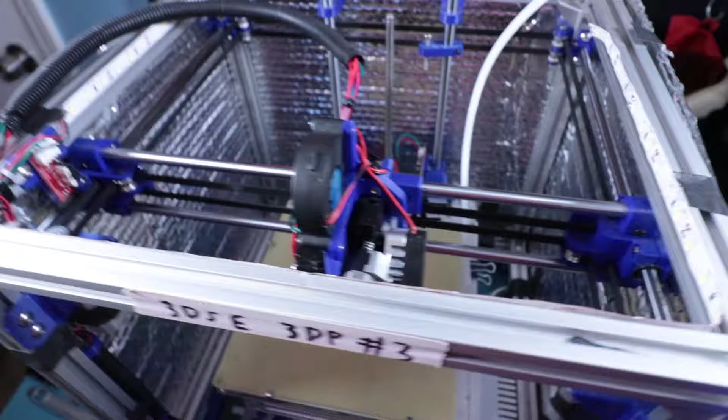This is your host Michael, and today I'm going to show you all how to make a custom little circuit board, specifically a breakout style board where you have multiple connectors going into or just feeding in other connectors so you can quick disconnect things.

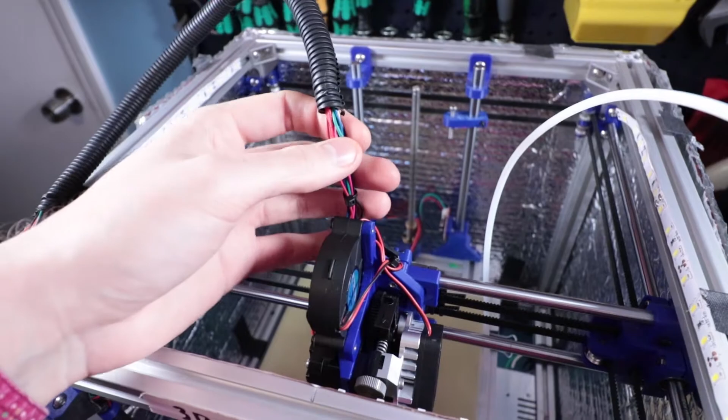Now the main reason I'm doing this is because with this particular wiring loom here, if I need to replace any parts, it's a big pain to replace any wiring or replace a particular unit, because I usually have to do these weird connections and have them zip tied so they don't come apart. And I've had issues with splices and wiring. In a particular example, the two fans for the hot end here, the positive lead for these are spliced in through this little connector here. I tried soldering it, but the solder link has failed.

So essentially what I need to do is basically make a breakout board between this part of the wiring harness and the various connections like the fans, the thermistor, and the end stop around the back here. Just in case I need to replace any of those or service them, I can just disconnect them from the breakout board and then reconnect them.

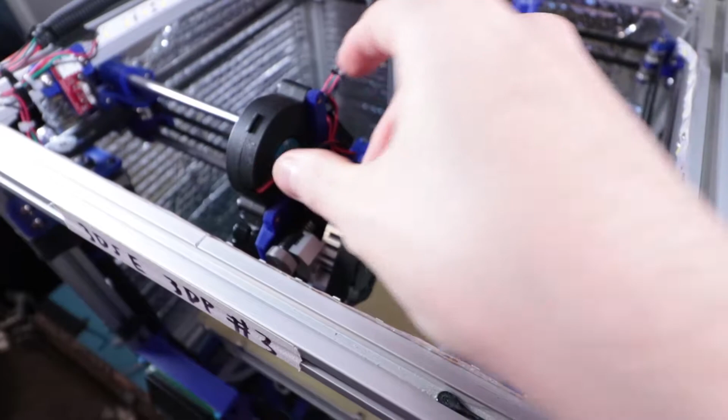Now the position for the circuit board, I think the most optimal place would be right here behind this fan. I have a little bit of an alcove for connections and pins and whatnot. It's just the best place, the most real estate, without taking up any real additional space or causing any issues with it colliding with any other moving parts. So it's pretty well protected.

The only thing I do have to account for is I occasionally have to pull this back to pull out filament and run new filament in. So I do need to make sure that the connectors aren't really interfering with my fingers when I do this here, as well as this tube. So there is a little bit of clearancing I have to take into account, and there's also the spinning gear wheel for this extruder.

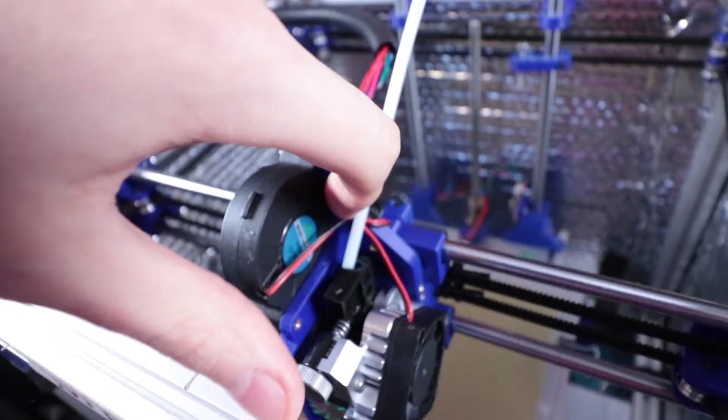What I'm going to do is I'm probably going to eventually reprint this bracket to where it has two additional holes to mount the circuit board, but for now when I do install the circuit board, I'm just going to drill a couple holes and do these little solder nut insert type things.

Now before I go ahead and start designing this circuit board, I need to figure out what components I'm going to be using, mainly because I need to figure out the package size of each individual component and how they're going to lay out on the board. So that's one of the first things you'll want to figure out, your bill of materials essentially for the components you want to solder on here.

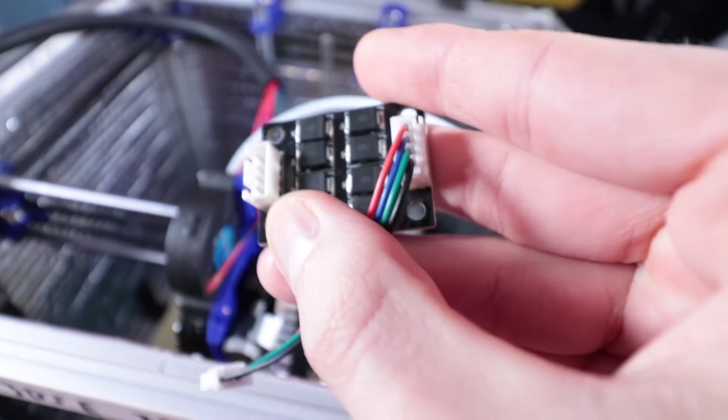Now there are a couple methods of attaching components to a circuit board. For instance, on this particular circuit board with these diodes, you see that they are SMT or SMD, so they are mounted directly using a solder paste. And then there's also through hole like these connectors here, which have little pins that you usually have to manually solder onto a board for low production runs. You can't just place them on the board with solder paste like these guys, which I actually do have a toaster oven slash PCB oven for that I made myself. It's a little bit more involved in the process, and obviously I don't have the parts here.

Since this is just going to be a simple breakout board, all I'm going to be doing is having connectors like these little female type JST XH connectors, as well as a couple of DuPont style connectors. So I've got a couple of 2-pin and 3-pin style JST connectors. I don't have the female ones with me right now. They're somewhere up in my attic. I have to fish them out for when I get these boards ready to rock.

These are the type of connectors that will attach the end stop as well as the thermistor to my breakout board. And then the rest of the connections will be handled by these DuPont right angle connectors.

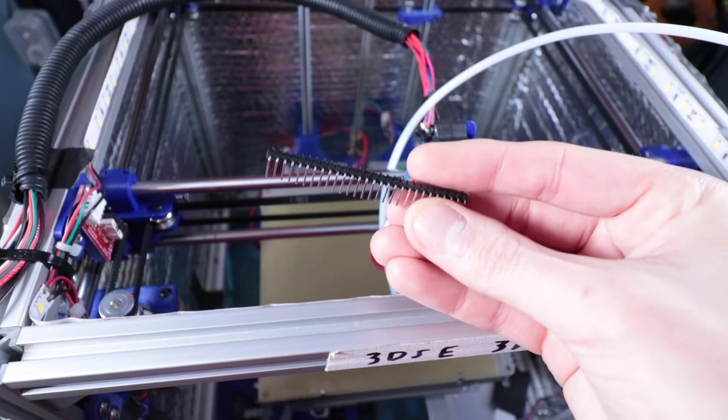So I'm going to use those two types of connectors, and that'll be the basis for it. I'm not going to do any filter caps or anything fancy like that, or any LEDs. Just going to keep it simple and make a simple breakout board. So let's go ahead and cut on over to Fusion 360. I'm going to show you the end product, and then we'll get into it.

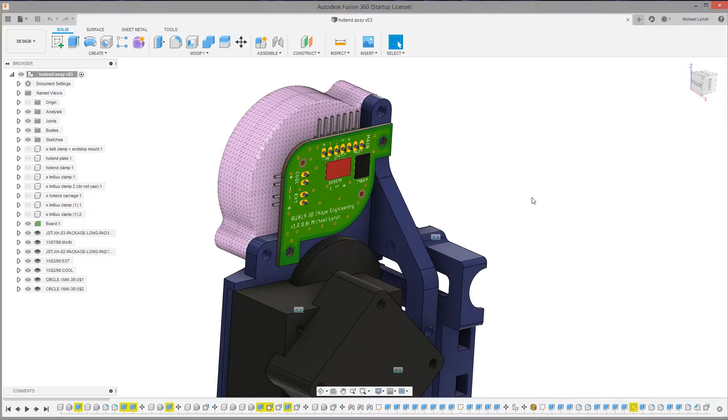All right, so we are in Fusion 360 now, and this is the hot end design file right here. And this is the circuit board that I made a couple days ago. I started out with Fusion 360, and then I went into Autodesk Eagle and made the circuit board design with the wiring and everything else. So what we have here is a main connector header, which is just 7 pins, and then we have an end stop connector.

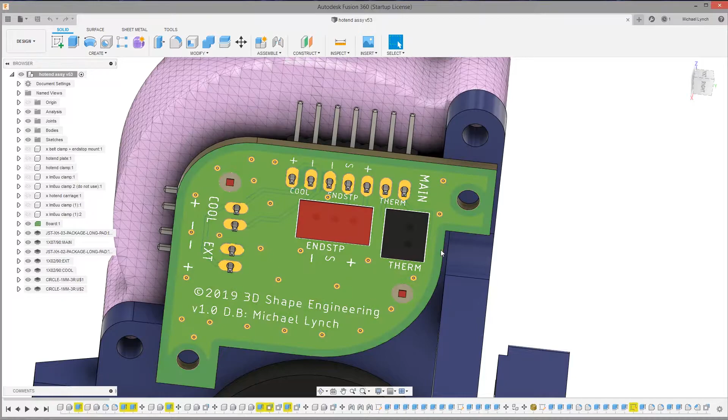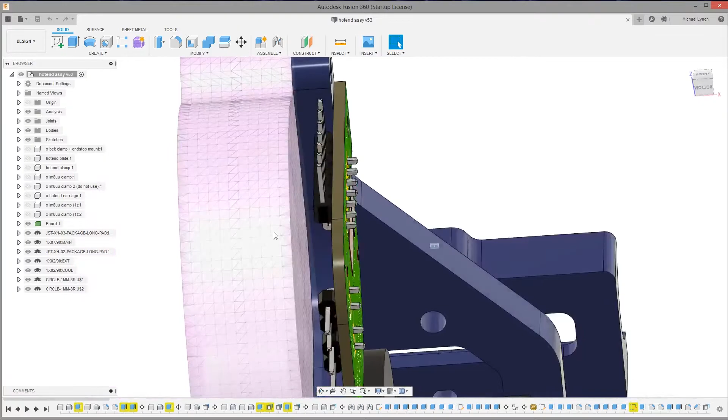Now that is of course that JST XH connector. I'll put it up on the screen. They don't really represent properly in the 3D view here. And then the thermistor, which is another one, which is a 2-pin. The end stop is a 3-pin. And then we have two angled connectors for the cooling and the extruder fans. As you can see, these angled headers are at the back of the board, so they're nice and tucked away and hidden. They're not really in the way of this mechanical bit here where I feed in the filament.

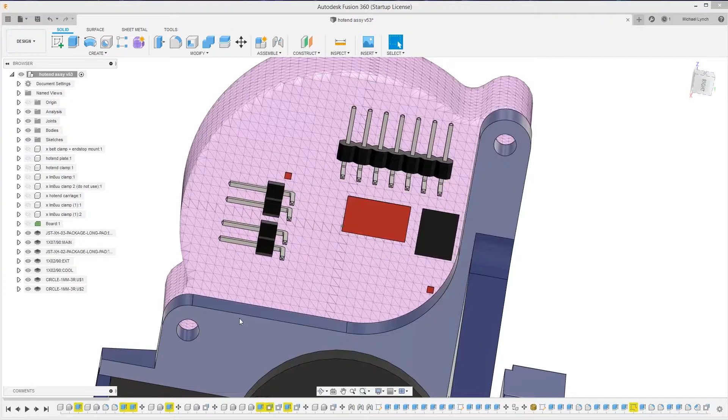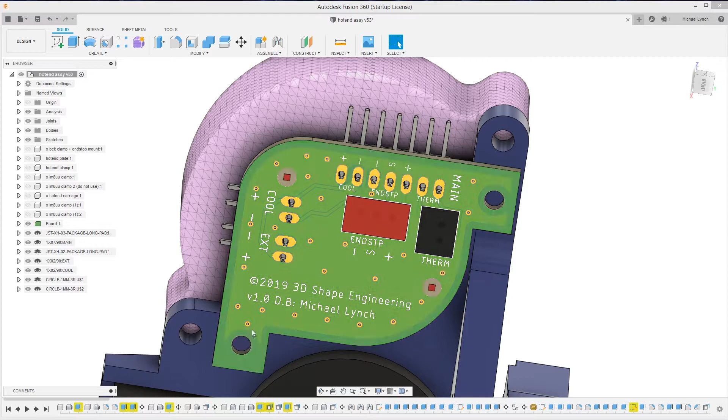So of course there's a lot of unused board space, but the reason I wanted to have the board's contour down here is quite simply because I wanted the board to make contact with this edge, so if you unplug or plug anything in, these two tabs on the side as well as the bottom aren't going to be the only points holding that load, in case it gets sheared off or what have you. So this is where these screw mounts will go. They're just little tabs that I left out.

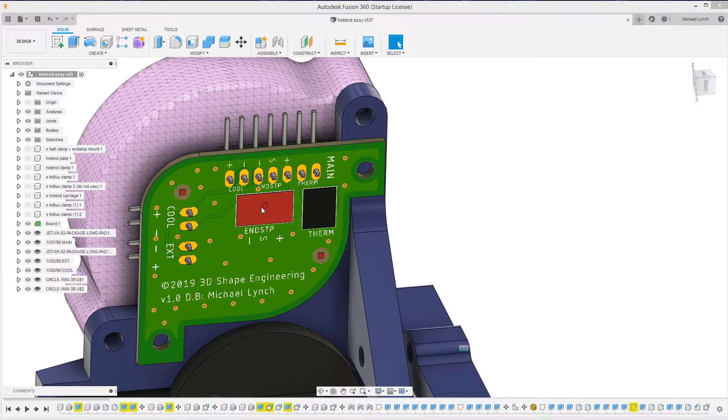Like I said, a pretty simple design, nothing too complicated here, very few traces, a lot of it's just direct stuff. And there are a few split traces. For instance, there is a shared contact for the extruder fan. The ground shares the same ground with the end stop, and its positive shares the same contact as the cooling fan. And the cooling fan, of course, has its own negative because that's controlled by PWM by the printer board itself. So that just snakes over to the contact points here. So it's 7 in, and then 9 out. So just a pretty simple design here.

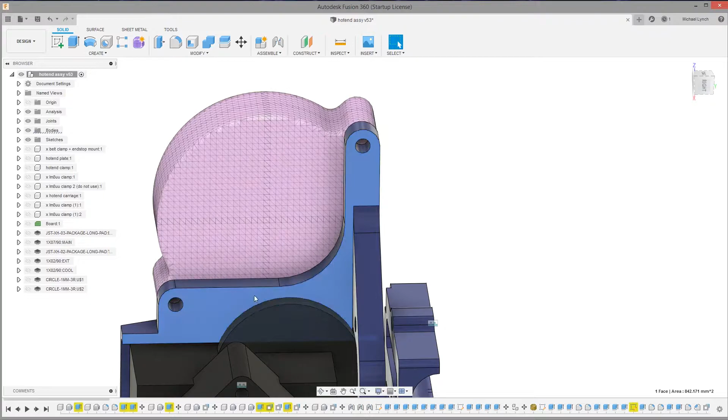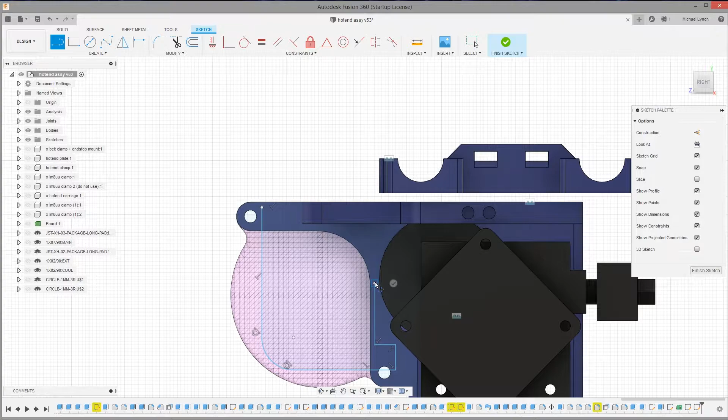So the first thing I want to do to get this design is make that guy invisible here. So I'm going to go ahead and create my sketch. We have our side profile here. Now I'm going to click on the face that I want to base the sketch off of, which is this guy right here, and then create a sketch on that face. I'm going to start with a basic line shape. Just going to have a little curved edge right here, 90 degree. And then we'll fix up the dimensions in a bit. Zoom in a bit, there we go. So I'm just banging out a quick design. Okay, so we have our basic shape.

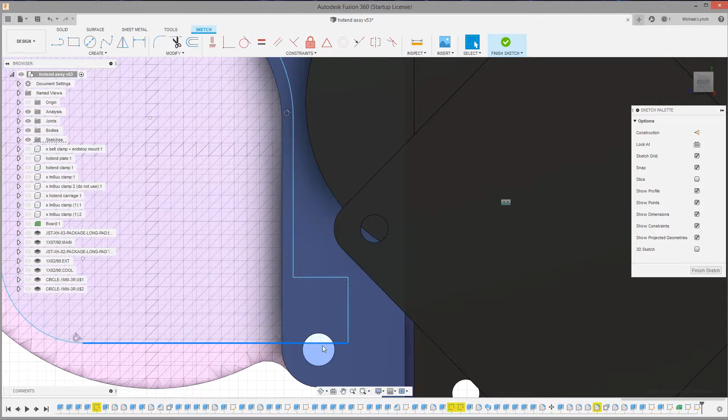So essentially we want to constrain it so it won't interfere with any other parts in the model. For instance, I have this conflict right here, where a screw thread may be poking out the other side. I definitely want to separate that a bit. I believe I had a good separation distance of about, oh no, it was 4. Okay, so I had 4, and these tabs right here are going to be about 8 millimeter.

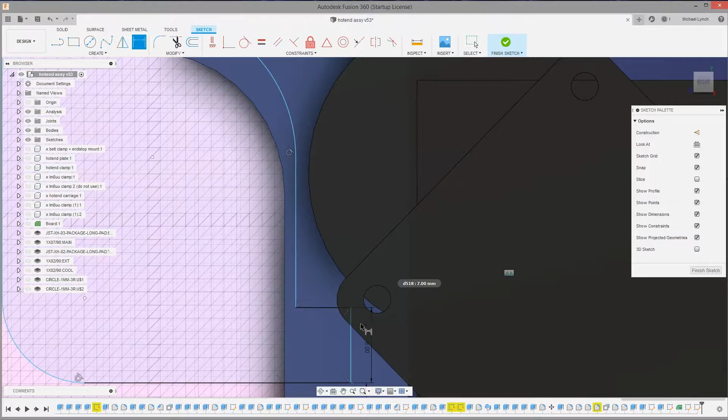Now it may look like it's conflicting with this heatsink here, which is what this part is, but it is not. The only thing I need to watch out for is this wheel, and of course try to keep any components away from this general area here. So just going to do the same with the other side, make it 8, and then a good 4 from that. Actually, I think that'll be the minimum measurement for that.

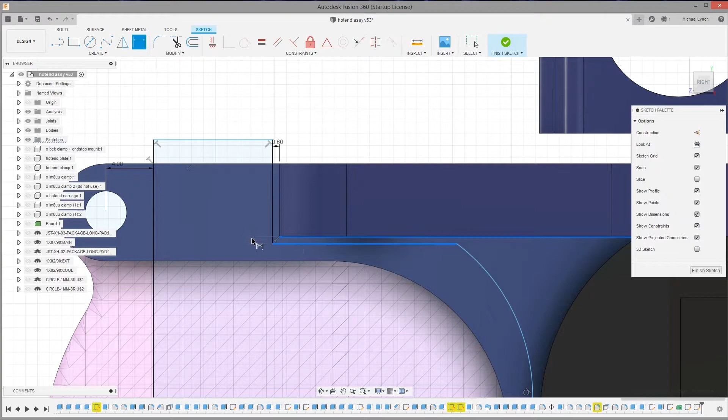So just going off memory of my other design here. Okay, so, oh, come on. There you go. 0.6, and I want to make that a tangent. There we go. And then I want to go ahead and make these two concentric. So I'm going to click that, then that. There we go. That's nice and hugs that contour nice and good.

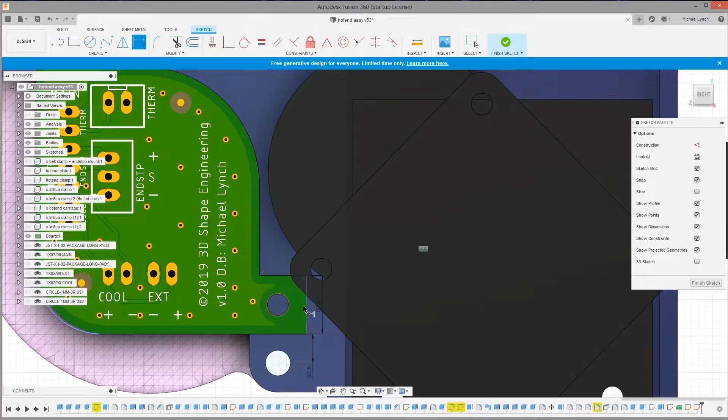And then I want to make this finger, I think 8. Let's see. Oh, I know what I did. So, yeah, just a solid 8 right there, just to make things nice and consistent. There we go, already picking out issues with my previous design here. Now, obviously I want to make the circle on this pretty much line up with the other one here. And I'm going to make it a little bigger.

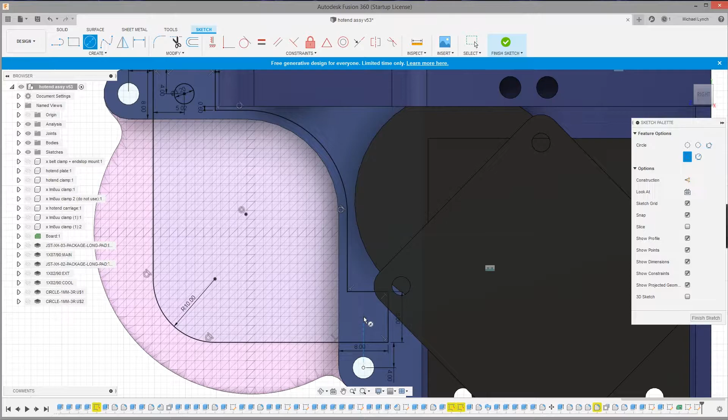I think that was 10. Okay, yeah, there we go. So we have our basic design. Just need another hole real quick. And I wouldn't say this is like a particularly solid CAD tutorial. I'm just trying to bang this out real quick just to show you all the basic setup here.

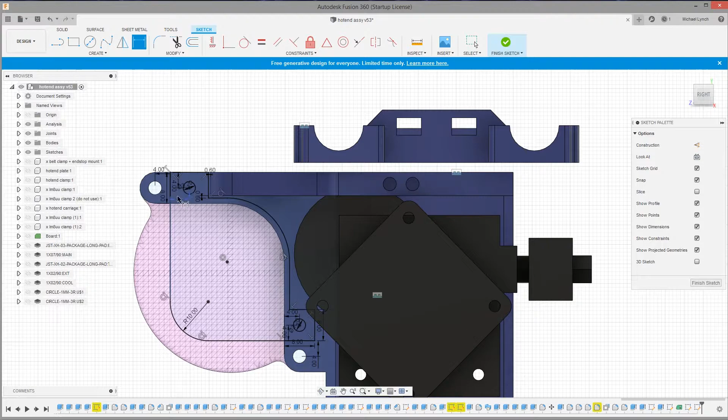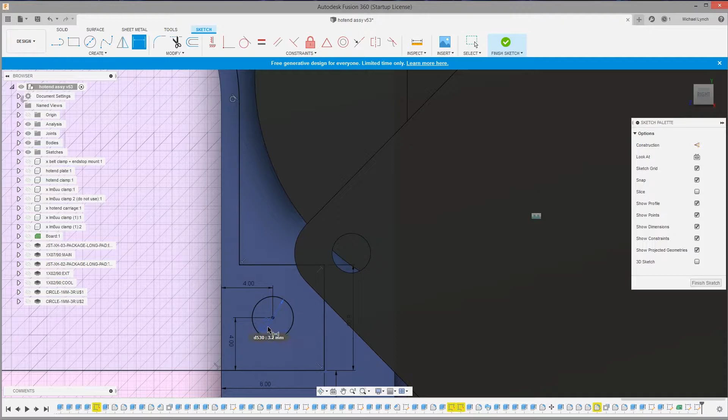So as you can see, I have that nice contour line just to hug the side of this profile here, and then I have our 2 screw holes set up. I went ahead and did a 3.2 just because that's a pretty typical drill size for circuit boards. 3 is a little bit small. You don't want to make it so your screw is super tight where you have to bore it out, because if you're doing a high volume run of this, you don't really want to have to drill through too much stuff when whatever PCB shop you're having this fabbed through is going to do it for you.

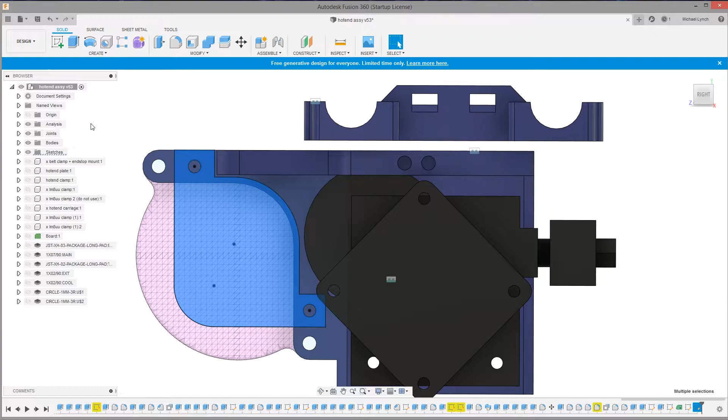So now we have our sketch. So what you want to go ahead and do is click on these 2 profiles here. Now if you have Fusion 360 and Eagle both installed, you can sync between the 2. So it's a really awesome feature. So I'm going to go ahead and select these 2 here, and then there's an option to go to create. Go down to create PCB, then click on create.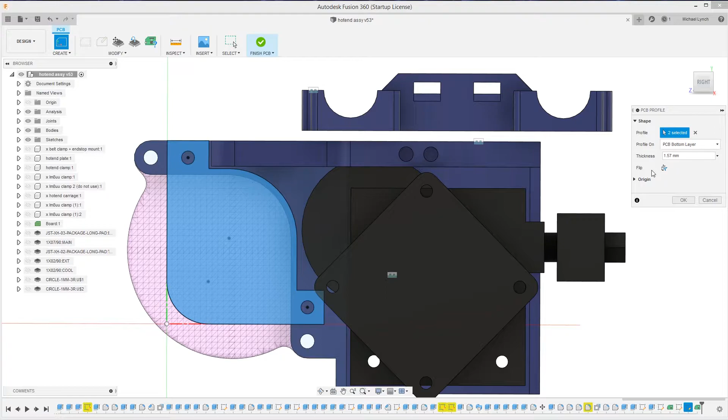Then there we go. We'll keep the thickness. That's usually the thickness for most circuit boards, 1.6 millimeter. You can go thinner or you can go thicker, but that's the average thickness for most boards, especially for the budget options like JLCPCB and OSH Park and a few other places that you can go to get circuit boards. That's like the average run-of-the-mill size. So I'm just going to go ahead and go with that. Doesn't really matter for this particular instance. This is just more of a simulation showing us the fitment.

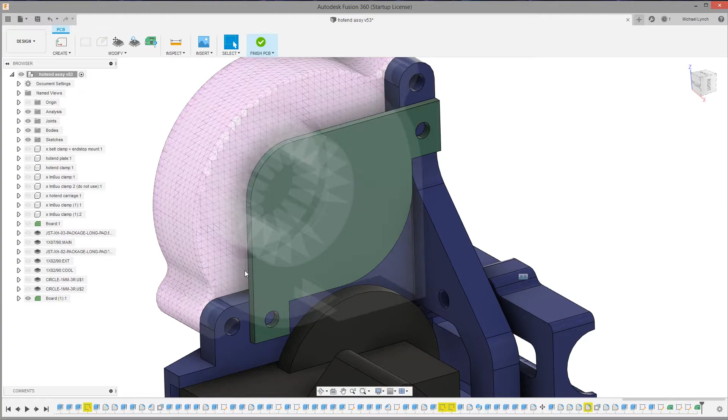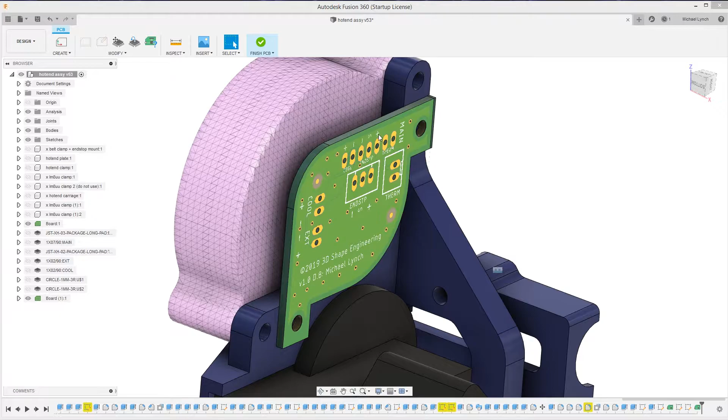So as you can see, it clears everything. I had a few other ways I had this design initially before I factored in the rest of the different parts. For instance, with the previous design, I had those angled connectors in the back. I had them in the front initially. Then I accidentally flipped them around one time while going between Eagle and Fusion, and just saw them in Fusion flip to the other side, and I was like, oh, okay, that works. That's really easy. You can see the naming and all that. You can see all these little diagrams super well, so that works out perfectly.

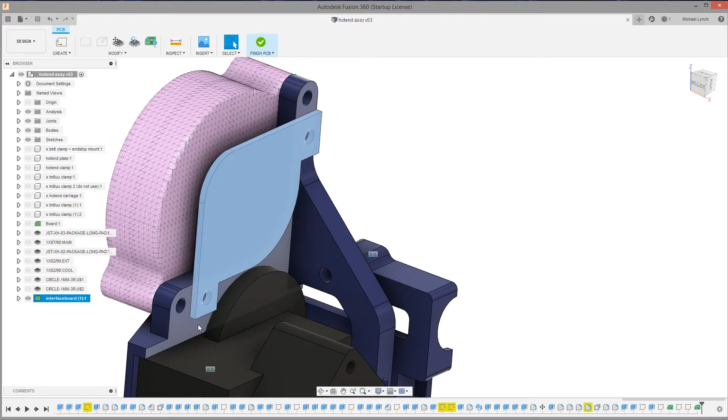So we have our circuit board design, and I'm just going to go ahead and name this, let's see here, interface. So we have our board design in Fusion 360. So all we need to do is go ahead and save this. Now we can go ahead and open up Eagle real quick, and we're going to go ahead and start a project. We don't have any projects, so we'll want to go ahead and do File, New Project, and this is going to be, I'm not going to call it board, just interface breakout. That'll be perfectly fine. All right, so we have our project.

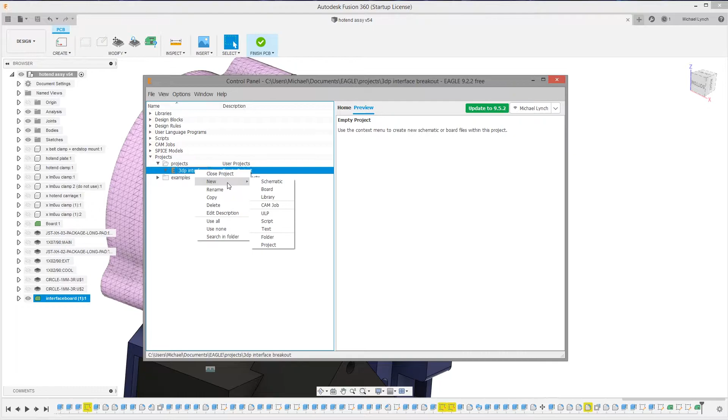Now what we want to do is create a schematic and a board. So I'm going to start with our schematic, and then we'll add in a board as well. The board, that'll be our second step of this process. But first, let's focus on the schematic. The first step in getting the schematic ready is we want to make sure we have all of our parts in here.

So for instance, I have 2 different types of connectors. We have the DuPont, and then we also have JST XH 2.54 millimeter pitch. So you always want to get the exact details. I think, okay, yeah, this is the exact kit. Pretty sure this is the exact kit I got. Well, at least I got another brand, but very, very similar.

So essentially we have our 2 pieces here. We're looking at the XH 2-pin and 3-pin males. That's kind of weird. You'd think those would be females, but just right at the top there, those 2 are going to be our connectors. And then we have our DuPont connectors. For the DuPont connectors, there's a library called Pinhead, which we'll want to import.

Now, I already have these libraries downloaded, but all you need to do is go onto Google and type in whatever part name you need, and then Eagle library. It's usually a .lbr file, and there's a few other formats as well. So what we want to do here is go to add part. That'll bring up our multiple parts. Now, I know for a fact that my parts aren't in the existing libraries already set up here, so I'll have to search for them.

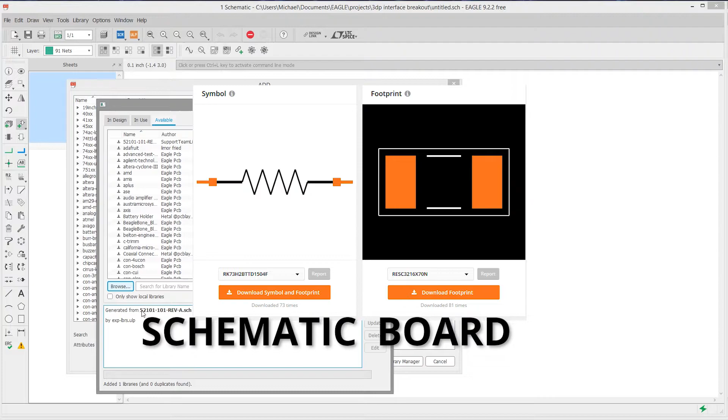Now, you'll want to make sure, since some library sites will specify, that there's the schematic diagram as well as the actual board circuit diagram. So there's the board view as well as the schematic view. You want both. Some libraries don't come with both, so you'll just want to watch out for that.

We have our libraries. So now we'll need to activate them. There's our Pinhead, and we'll hit use. And then we'll go to JST. There it is, use. All right, so now we have our libraries added in, and we can search by JST. That will give us our connectors here. We'll need the 2-pin and the 3-pin.

As you can see, there are different choices. The footprint is exactly the same. The gray portion is the silk screen, so that's the label as well as the name and value. And then of course you have these two little pads here. There's a round pad and a long pad.

If you are new to soldering and aren't super experienced, I highly recommend going with the long pad, because if you mess up, the bigger the pad, the less of a chance you'll have of lifting the pad off the board. If you have to extract the solder off the board to make a correction, say you made a mistake and need to suck out the solder to extract the part, maybe it's lopsided, you're going to have less of a chance of lifting the pad if it's a bigger pad.

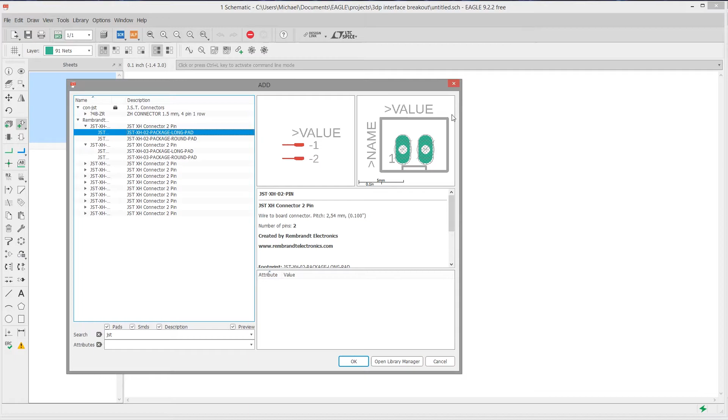So I'd highly recommend going with a long pad, which I'm going to go ahead and do. I make mistakes too, and with these through-hole things, you just can't really go wrong with that. I'd much rather have more room for error in case I do make one, because I'm only human. So I'm going to place one of these here because we need one, and then we're going to go back to our parts manager and add in a 3-pin as well.

Now, it doesn't matter the order of everything here. You essentially just need to organize everything so the schematic is, A, clean, and B, easy for you to decipher and figure out what's going on with it. So I'm not going to go into all of the optimizations of how to make a schematic.

I'm actually going to link another video. It's by a gentleman named Jeremy Blum. He has a really good tutorial on Eagle. I'm just going to go over the basics for making this breakout board, so I highly recommend watching his video if you want a more in-depth view of this particular software.

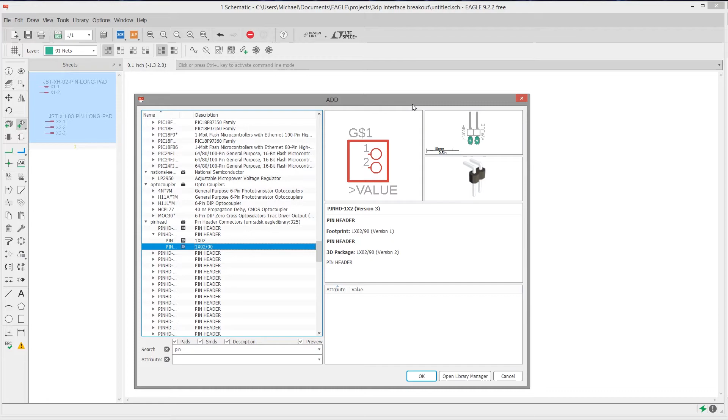I'm going to go ahead and search for the pinhead library. You've got to scroll down here. There we go. So we need a couple of 2s, get our angled connector here. These 3 views here, at least these 2, are the required views to make everything work properly. This is our schematic view, that's our board layout view, and this is a 3D view, which Fusion 360 uses. It's not necessary. These JST connectors don't have it, but these guys do.

So I'm going to go ahead and add these guys in, and I'm just going to get a couple here. There we go. We just need one for each fan. Then we're going to add another part. We're going to go all the way to the 7-pin, add that bad boy, the angled connector, just to make it look cool in Fusion 360.

So there we go. In order to flip these guys to the other side, for Fusion 360's purpose at least, I'm going to click on this mirror tool up here, click on these guys, flip them around. Then go to the rotate tool and rotate these 2 guys around.

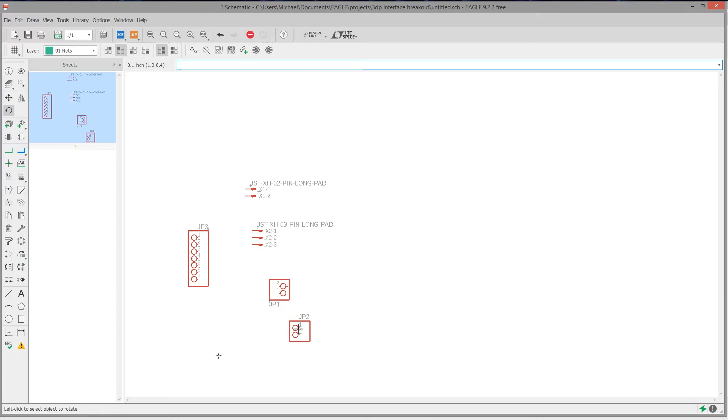Now, one thing with this program is it's really finicky when it comes to where you click on things. As you see, there's a little bitty crosshair down here in red. You'll want to click on that in order to rotate it. If you click anywhere else, you're just going to get a binging noise, and it's just going to annoy the heck out of you.

What I want to do now is start labeling some of these connectors, because JP3, JST, all this stuff is not going to help us when we go to design the board and route all our connections. So I'm going to rename this. Typically, you can go to name and value. For some weird reason, these guys don't always want to cooperate. That one does, but the best way to do this is to right click and then go to properties.

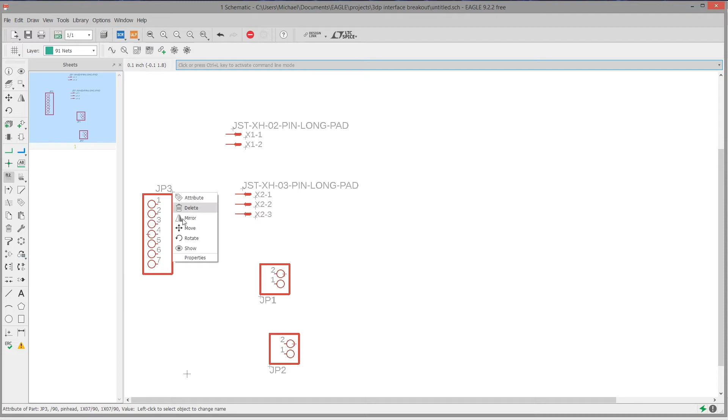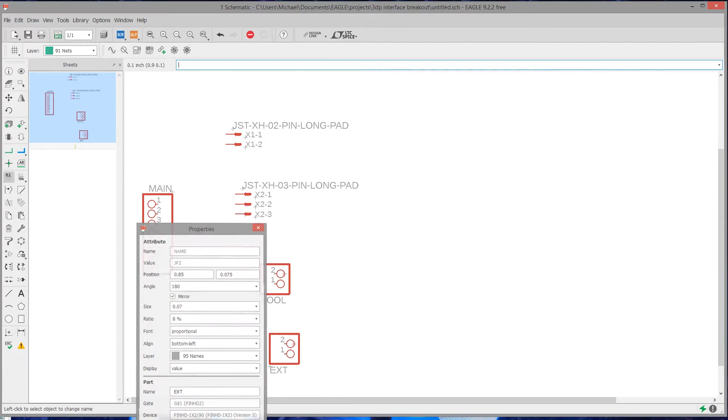And then we have our values and attributes here. The one you want to change is this one here. I'm just going to change it to main. And then I'm going to change this one to cool fan. So we have the cooling fan, and then we have, that'll be short for extruder fan, and then we have these guys here.

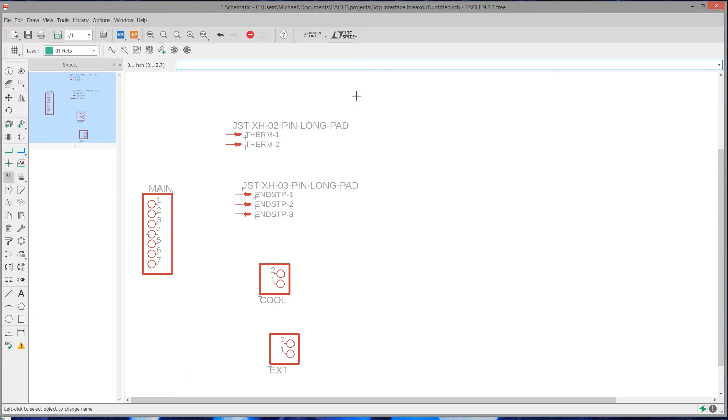So that one is going to be our thermistor. So I'm just going to put thermistor, or therm, and this one's going to be endstop. That one's a little longer, so I can make the name a little longer. Okay, so we have everything labeled here. Now, I don't really have the polarities named, but I'm going to make this bottom one a ground. So I'm going to move this and make this a little cleaner.

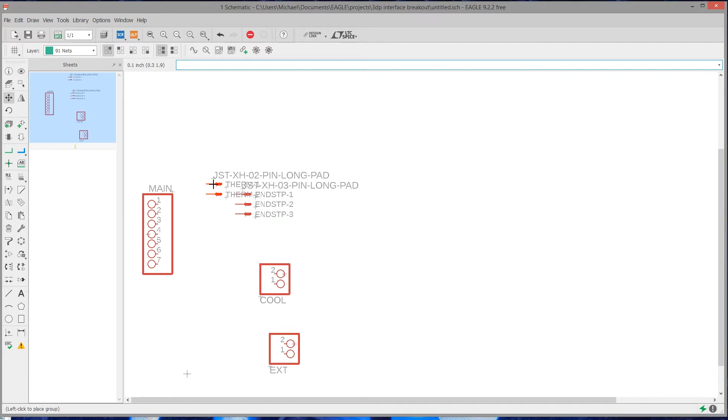Now, with these guys, I don't know what it is, but only one particular part moves at once. To keep it nice and clean, I'm going to use this group tool up here on the left-hand side to click and drag and select everything in that group. And then I think you need to still keep it in the group tool in order to move it. I want to keep these guys connected to these joints up here. Oh, and I'm going to move the endstop first, actually, just so they aren't knocking into each other. Okay.

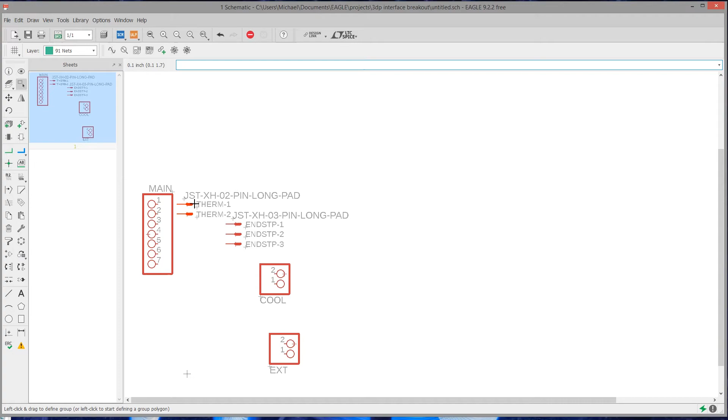And really with the schematic view, the name of the game is just organization, keeping everything nice and organized. And these guys are a little easier to move just because they all move in one group. So this cooling fan, I'm going to keep like that. I'm going to keep this here. Actually, I'm going to rotate this. It doesn't really matter what orientation it's rotated in the schematic view because that won't really reflect in the board view. This is just to keep everything nice and organized here.

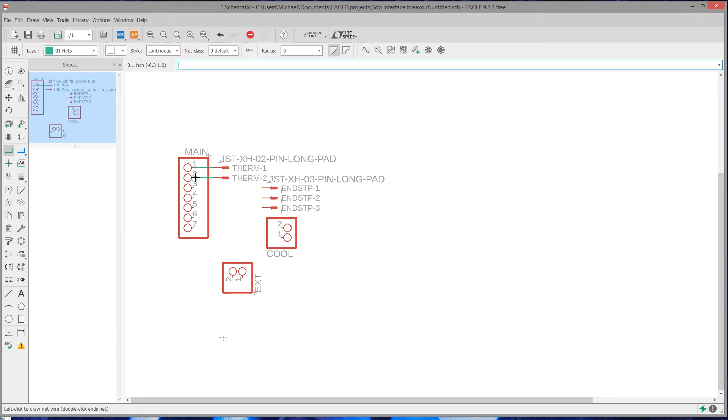Now what we want to go ahead and do is use the net tool once we have everything moved to where we need it. Basically, you're just clicking from contact to contact. And you can also click an open space once you've clicked from one contact to make just a wire dead end if you need to do that. So something like this. There we go. All right. So that'll be our negative lead going into number 2. So we'll just keep that in mind.

Actually, let me move you a little closer here. There we go. Kind of annoying finding that out. Oh, there we go. Okay. So I'm going to try to keep this consistent, doesn't really matter which one. So that'll be our negative for that. And then, of course, we'll link in our positive too.

All right. So now we'll want to create a splice between our end stop. This will be our ground. So that's going to go to our number 2 contact. There we go. Okay. Keep this cleaned up. Move our text. Rotate our text. So this will be our positive, which will splice into the cooler's positive. So there we go. Okay, so we have our simple schematic.